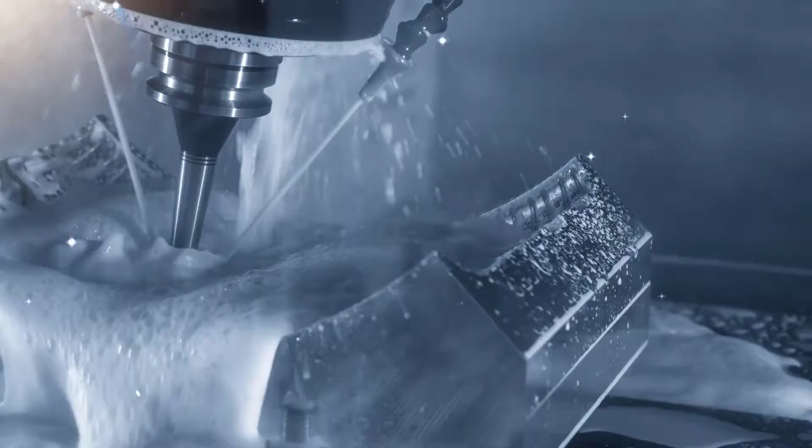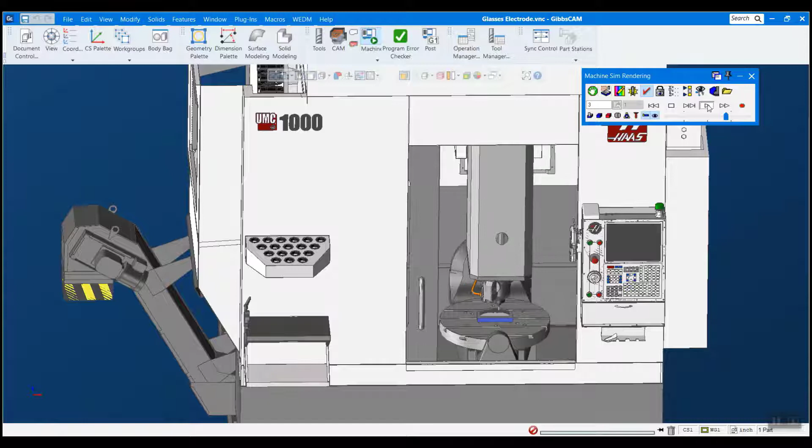I think everyone can recognize the importance of getting an accurate machine simulation in their CAM product, especially for more complicated machines such as 5-axis or Swiss. But because of GibbsCAM's universal kinematic machine, this is actually one of our biggest strengths.

So when you receive your machine simulation from either GibbsCAM or your reseller, it should come in a zip folder or some other kind of compressed package file. However, there are a couple easy steps you need to perform in order to get your machine simulation up and running in GibbsCAM, but it's actually very easy, and I'll show you how in just a couple minutes here.

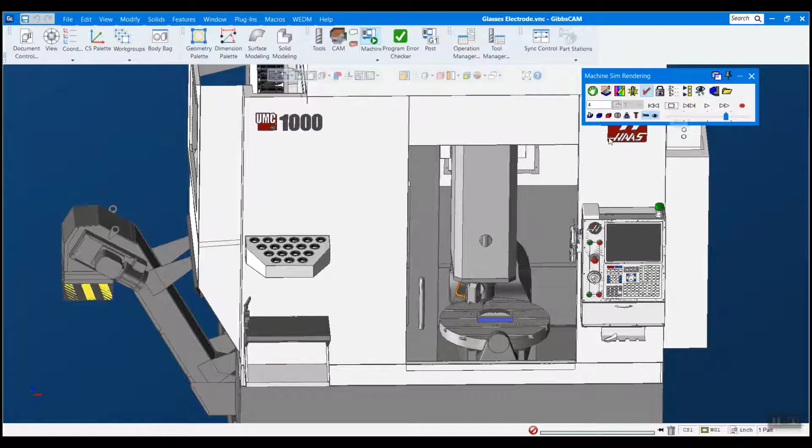So this is an older version of GibbsCAM here that I have my machine in, and I want to get it running in my new version here. So I'm going to stop this, and we're going to switch over to my new version here. And this is just a splash screen. I haven't loaded in a part or anything like that.

I'm going to open up my File Explorer here and just navigate to wherever you saved your package file, your zip file that you got from your reseller. And I'm going to be loading in a Haas UMC 1000 in this case, the same machine you just saw prior. And all I have to do is click and drag this and drop it right onto the GibbsCAM splash screen.

And a post-package extractor comes up here. It's called the post-package extractor because your machine typically comes from the post department and it works with your post to create that simulation. So all of these are actually the individual components of the machine. It's not an assembly. This allows us to move an individual component without moving other pieces. So these are all the different pieces of our machine. You can see there's quite a lot to it.

And you can just go ahead and hit OK. But in this circumstance, I'm going to show you Open Target Location just to show you what it did here. So this is my GibbsCAM install directory. And if I go into my machine sim folder here, we can see that it has taken the Haas UMC 1000 folder and put it in here. And here's all the components that I was just talking about.

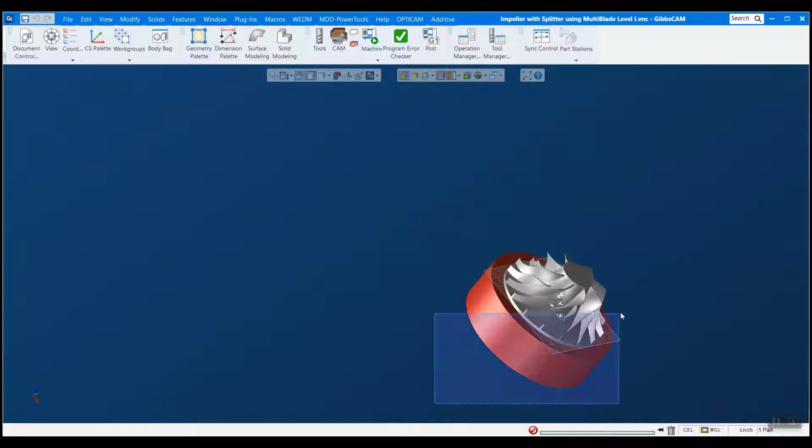I have here a 5-axis impeller that I've previously programmed. And if I open my tools in CAM, you can see that I do indeed have a couple operations here. So the first step to doing this is we want to go to our document control box here.

And this is a list of all my MDDs that I have. And you can see that Haas UMC 1000 is in fact in here. So I'm going to select that as the machine that I'm using. And we have to make sure to match this to our simulation here. So I'll show you how to do that.

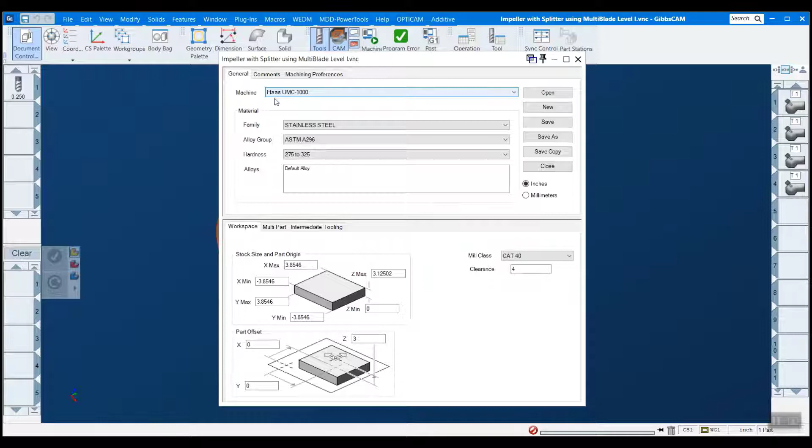I want to use the machine simulation, not OpSim, because machine sim is the one where we can actually render that kind of stuff. And it won't be loaded in by default. What you have to do is go to load machine here, and these are the 4 machines that I have, and I'm going to hit load machine, and it loads it in.

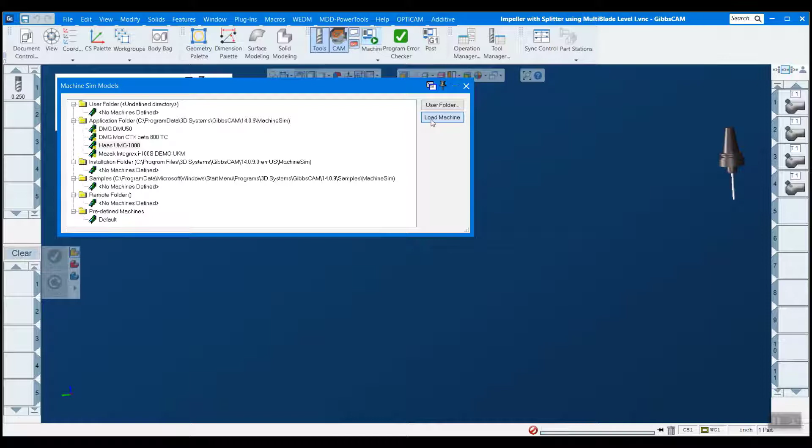It's pretty simple. Might have to rotate, get the right angle to see the front here, but that's our machine. You can see it only took maybe a minute to actually get this in and working.

And there's one more thing I like to do before we actually simulate this. One thing is turn on program error checking, and this will check your program for errors like the name denotes. And then the other thing is collision checking, and you want to make sure that that's on, and that's going to detect throughout the simulation if anything collides with anything else. And it doesn't have to be the stock, it can be fixturing, it could be components of the machine, any solid model that you see here. If 2 things collide, it will let you know.

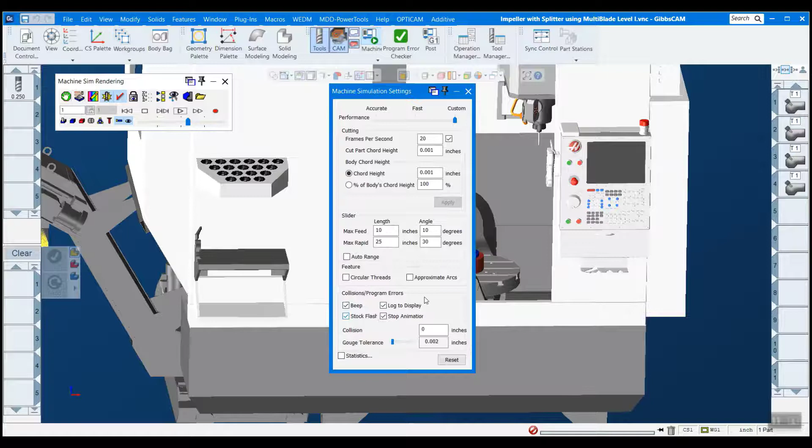And then the last thing we have to do is right click on the bar here and go down to settings, and you can turn these on. I'd like to turn all 4 on, but basically what you're telling this to do is, hey, once I've found a collision, what do you want me to do about it? So I want it to beep, I want the stock to flash, I want to display, and I want you to stop. So now that that's done, we're ready to hit play and see what happens.

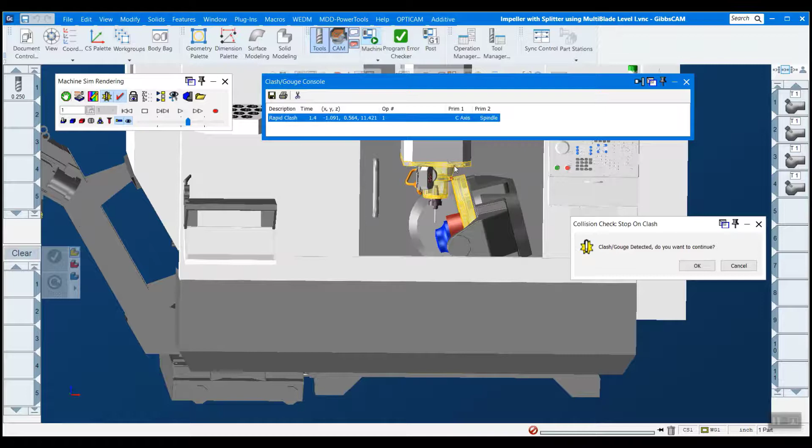And you can see pretty immediately it did indeed find a crash, and it tells you which components are colliding. So we have the C-axis hitting the spindle in op1, and then it gives you the XYZ coordinates of where that collision is happening. And you can see it also turns the two components yellow, and there's a nice little red dot there showing you where these collided.

So as you can see, it only took about 2 minutes to actually get this set up and working with all the settings that I like and that kind of thing. So it's pretty easy. Ensuring that you have an accurate machine simulation is key to many kinds of advanced machining, as well as protecting the investments that you've made in your machines. In GibbsCAM, it's easy to set up and use your machine using this method.